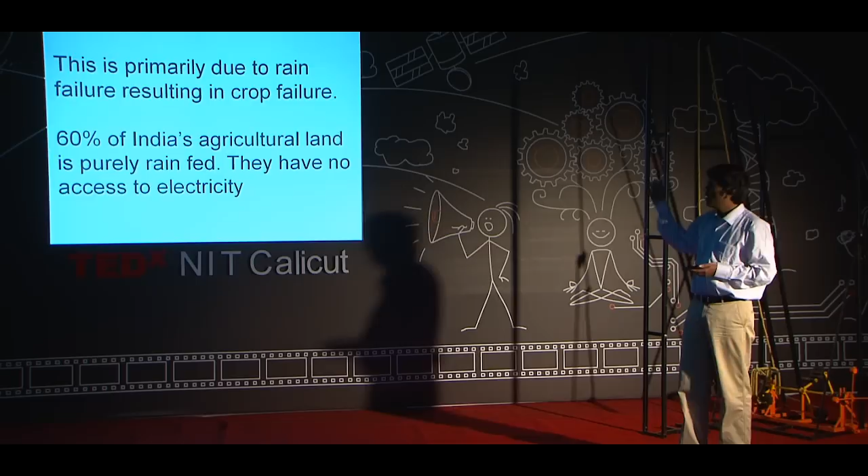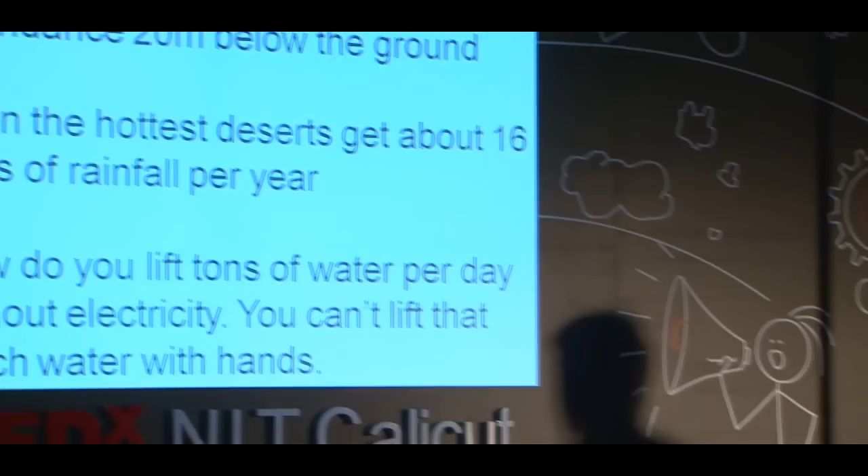The fourth is the fertilizer. Fertilizer you can buy from a shop. There is no contingency in fertilizers. The only contingency is in water supply. You don't know when it would rain. Water shortage is not a supply problem. It's a distribution, storage, and transportation or lifting problem, because even the hottest desert in India has 16 days of rainfall. So during those days of rain, there is plenty of water. It's even in places where there is acute water shortage towards the summer.

And how do you lift tons of water from the ground when the water level is, say, 10, 20 meters below the ground? You can't lift that much water with hands because you need tons of water. Wheat requires between 7 to 15 tons of water every day. Now, if you use drip irrigation, you can do it by 5 tons or 7 tons. But you cannot lift that much water of 5 to 7 tons per acre per day for wheat with hands.

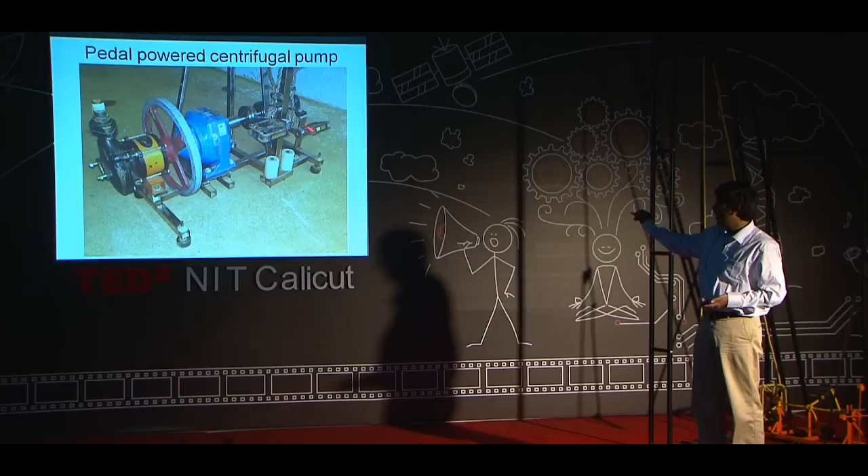So I decided to make a pedal-powered centrifugal pump. What you see is a pedal-powered centrifugal pump, and those are the pedals there. Those two pedals will go up and down. It's similar to a stepper mechanism, but not exactly a stepper mechanism. It's cheaper than manufacturing a stepper mechanism. That is the axle, and you have a gearbox here. And this is the flywheel, and that is the pump. So the pump is only this much, and this is the inlet section of the pump, and that's the outlet.

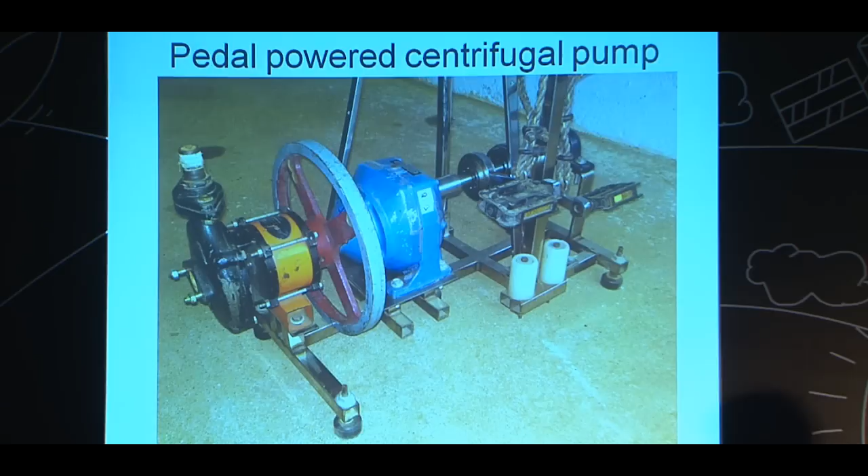So if you substitute this with an alternator, it becomes a pedal-powered generator. And if you remove this and put a compressor and then a condenser, it becomes a pedal-powered refrigerator. According to Wikipedia, an average adult can generate 240 watt-hours in 1 hour of exercise. 240 watts you can generate in 1 hour. And professional sportsmen can create 600 watts for 1 hour. So 600 watt-hour. That is like working 2 laptops.

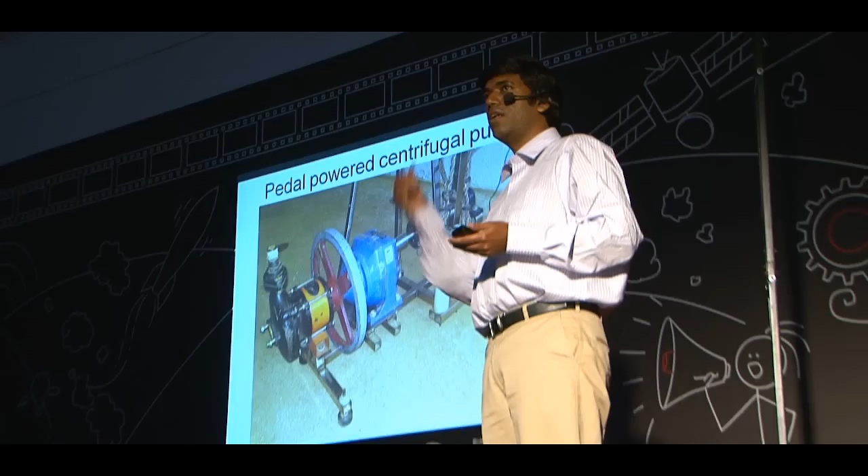Say a laptop consumes about 15 watts. So if I exercise for an hour, imagine if I can recover, say, 150 watt-hour from a battery. So I can work a 15-watt laptop for 10 hours with about an hour of exercise. So that's not bad. If you're using LED lighting, with half an hour of exercise, you can power your entire lighting needs in a hostel for a day. Imagine you are a single occupant.

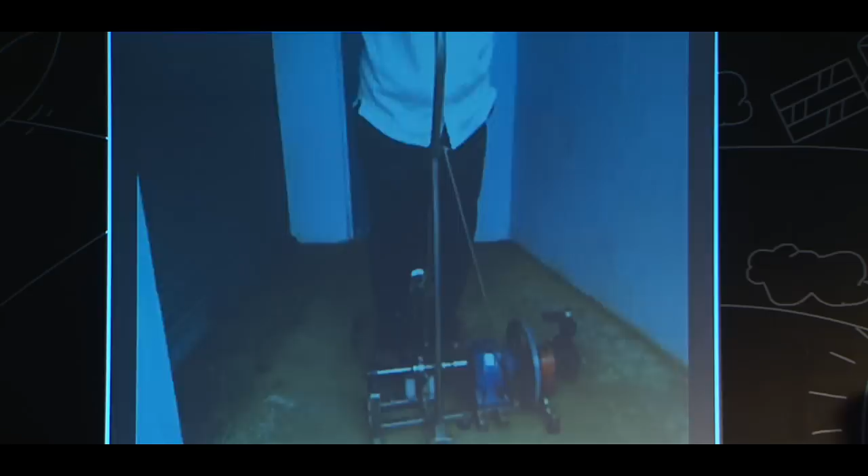No, this one. So I made this, and this is a man pedaling, and that is a rotating part, and he's pedaling slowly, and there is a gearbox here. And the gearbox has a life of 20,000 hours, so it never fails. And you get up to 2,000 RPM, which is the required speed to optimize a generator, and it's also good for pumping. A flywheel is added to make the flow of water output smooth. It's also good for pedal power generation.

So next video. Now that's the close-up, and the handle is in the front. Next video. Yeah, this is a video of this being used as a pedal-powered water pumping machine. My friend Padmanabhan is holding the pipe from the second floor, so this is at least 9 meters. It can pump up to 20 meters if the pump is more efficient.

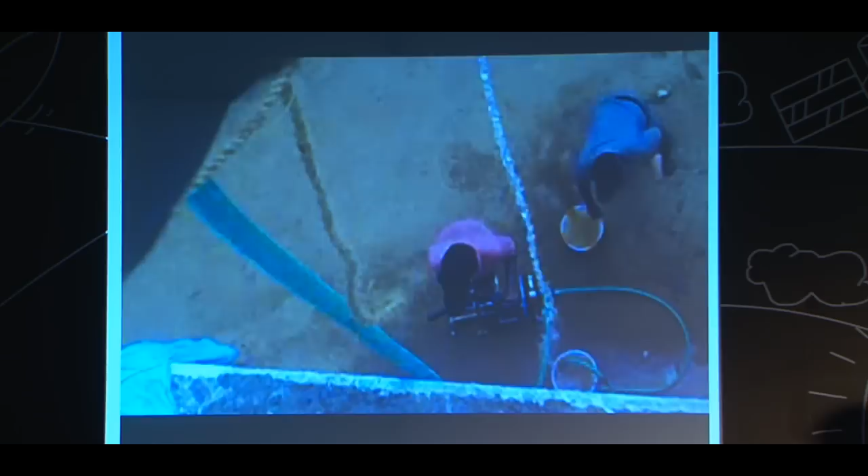Now I'm using a locally made pump, but if it's a stainless steel pump, it can pump up to 25 meters. But again, I'm not going to spend more time on this. You can see the discharge is fairly good. It's about half liter per second, which is fairly good, about 30 liters per minute. I'm going to go to the next slide. So I'm standing at the bottom and I'm pedaling. It's like once per second, so it's not very strainful. I can do it like that for about 20 minutes without stopping.

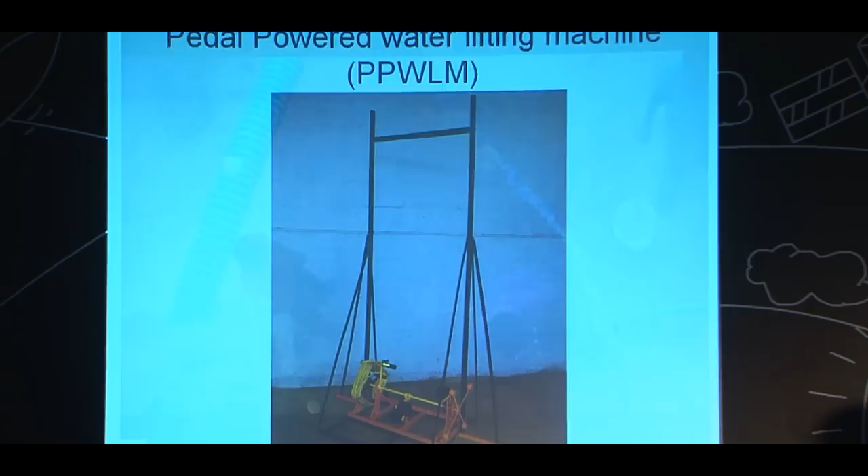Now, after I made this pump, I was so happy that it worked the first time I made it. Actually, it's the fifth prototype. The first one worked for 2 meters, then 3 meters, then 9, 12 meters now.

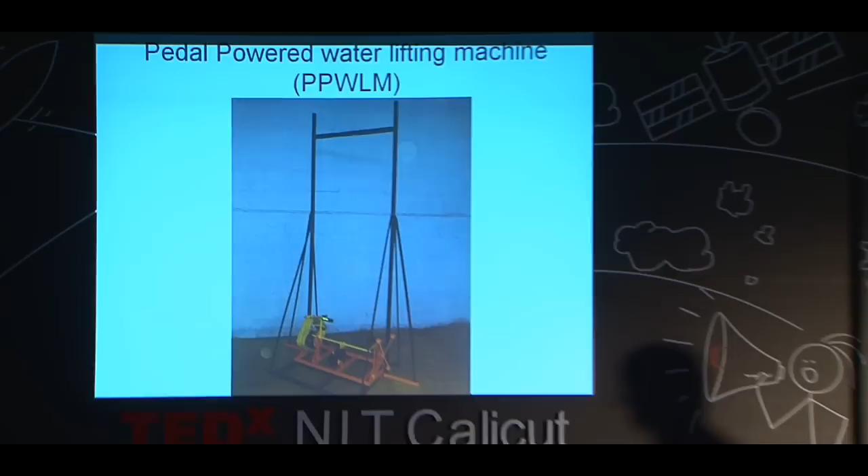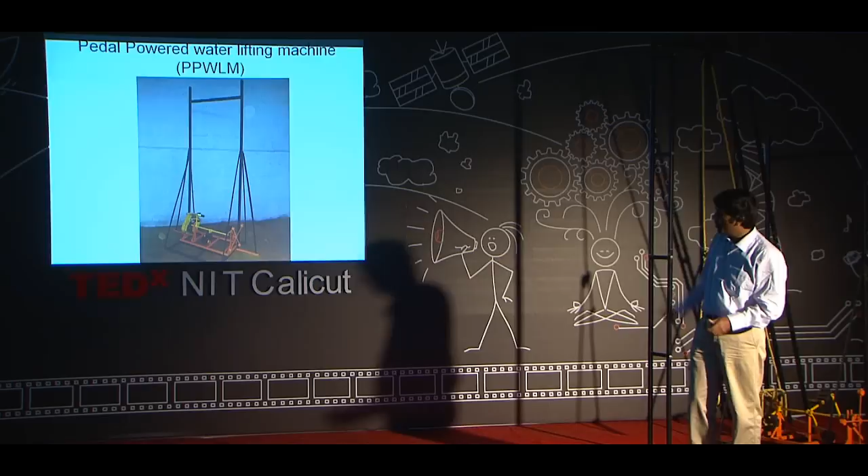I realized that the efficiency of pumping is only about 30%, but the efficiency of lifting is about 100%. So if I lift this, all the energy that I'm generating from my body is being used to lift the cell phone. But if I pump water up, at least 70% is lost. And for lifting, you don't need a gearbox, you don't need high RPM, you don't need a flywheel.

So this lifting is going to be at least 3-4 times cheaper, 3-4 times more efficient, 3-4 times less maintenance requirement. So I got a good idea after the less good idea. You always get good ideas late, but that's okay.

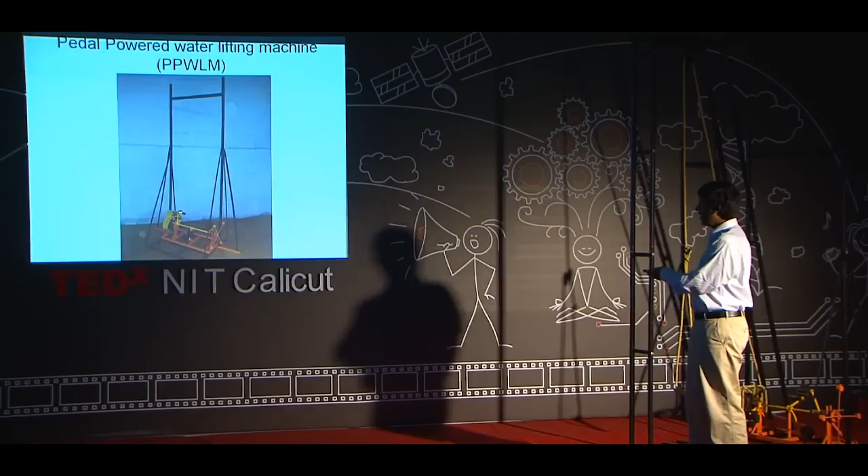So I made this. This is the machine, and this is my friend Padmanabhan there, and that is the bucket. It's a 65 kilogram capacity bucket, and you have 4 holes there, so you can adjust the amount of water inside. If you open the first hole, the water will overflow. And there is a pipe.

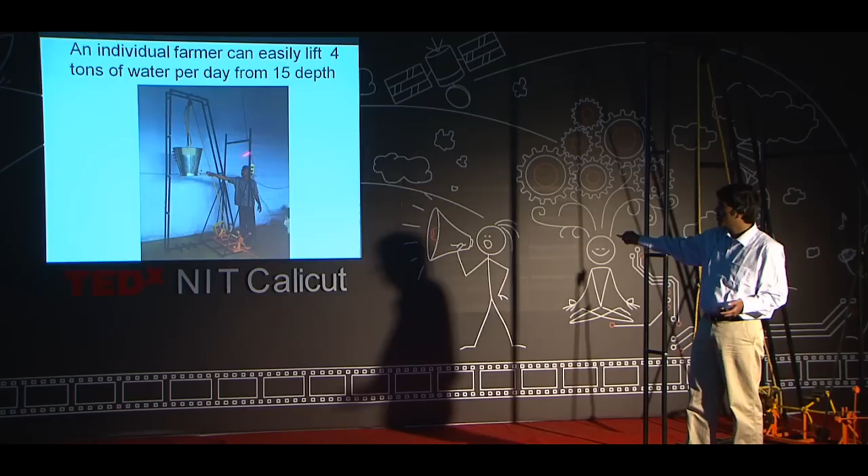So you pedal and you lift 65 kilograms of water, or even 100 kilograms of water if the bucket is made bigger. And when the bucket comes to the top of the well or the river, you open this pipe and take the water out into a storage tank. And then you lower the bucket and swing the rope, and the bucket will be full in 2 or 3 seconds. And then you repeat the cycle, which I will demonstrate here.

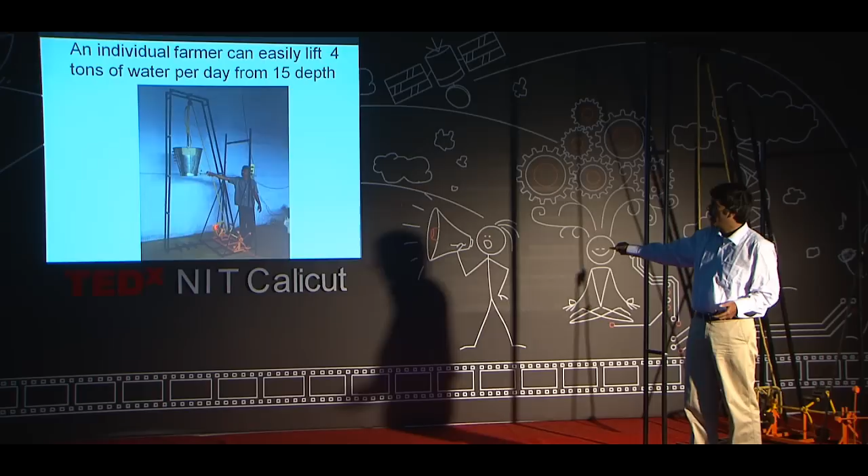This is the pulley, and if I reduce the diameter of this pulley, then I can lift, say, 120 kilograms. If I reduce it still further, then I can increase to 200, 300 kilograms. So there is no limit to the amount of weight that you can lift. But after doing lots of calculations from the angle of economy, we realized that 65 to 80 kilograms is the best to keep the cost down. Of course, if you increase the weight, the speed of lifting will reduce, but that doesn't matter.

He weighs 49 kilograms. He comes to the machine and he starts pedaling. As you can see, it's a 4-pedal mechanism which I designed. He's pedaling it slowly. We tried with the 2-pedal mechanism, but it cannot lift this much weight. It can only lift about 10 kilograms. For the ease of explanation, this is a bucket which has the capacity to lift 65 kilograms.

It contains water up to 50 kilograms, and he is now lifting it. It goes over to a pulley, as you can see, and he is now lifting it by pure pedaling. Once the bucket reaches the top, he will stop pedaling, and there is an automatic clutch lock mechanism. Once you stop pedaling, the bucket will not fall down, even if he steps off the pedal, until you release the clutch.

And once the bucket reaches the top, he will open the pipe and drain the water. This is a 1-inch pipe. It takes 30 seconds to drain the water. But if you put a 2-inch, 3-inch pipe, the water will be drained in, say, 5 seconds. Since we don't have a well, okay, done.

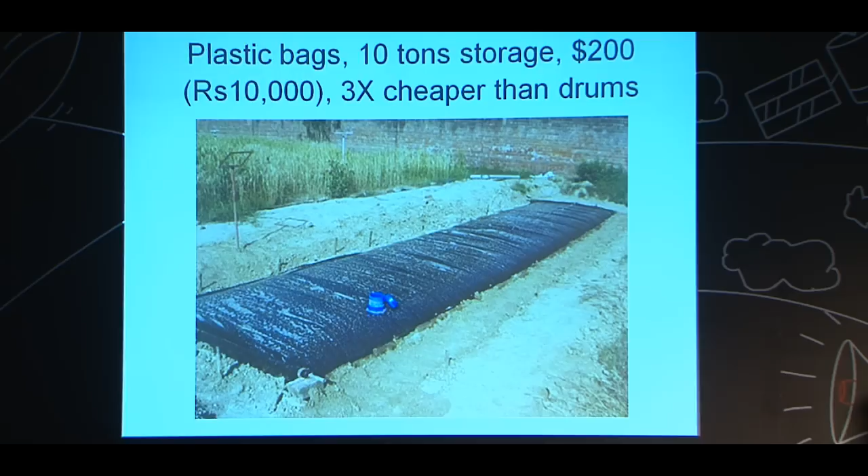Okay, this is recently made available flexible plastic tanks. Whenever there is rain, the water levels are high, as high as 5 meters or 2 meters, and then farmers can lift tons and tons of water. A farmer can lift even 10 tons of water in one day without much effort when the water level is high. This is a flexible plastic tank which can store about 10 tons of water.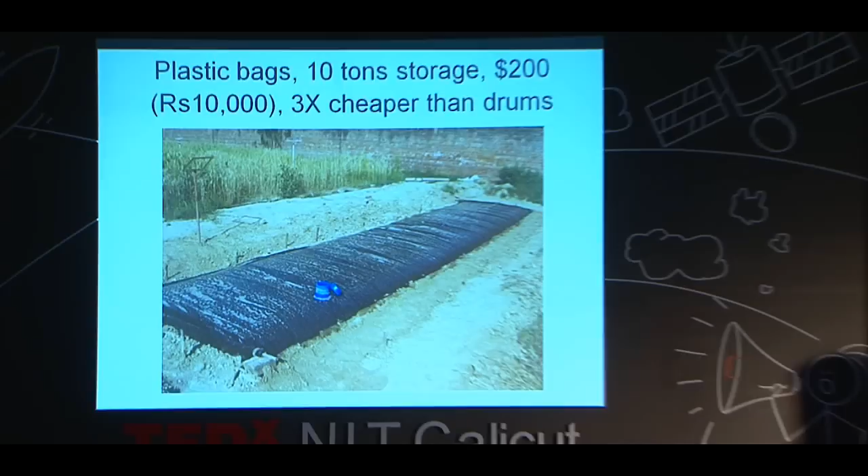It's pretty damn cheap. It's about 3 times cheaper than the plastic drums which are normally used by some farmers. And the transportation cost of this is also almost zero because you can fold it and put it into a car, unlike the drums. As you're aware, most of these farms are not easily accessible, so the cost of transportation of the storage devices is a major factor. Some farms are something like 6 hours away from the closest railway station.

Now, how much land can a farmer wet by pedaling? For wheat, an individual farmer can wet 2 acres of farm by pedaling 2 hours per day for a water depth of 20 meters. This is considering the input of rain. Sometimes people ask me, can a farmer actually lift enough water for farming, because farming needs a lot of water? The answer is yes, because a lot of this land is not in deserts. There is rain. That's why farmers plant seeds.

But the dates of the rains are not very predictable. Imagine farmers expect rain after 2 weeks, and they plant the seeds now and put some water. At the seed level, the plant requires very little water, which they can lift by hand or by some other method. But when the plant grows up, it needs a lot of water. Now imagine the rains are late by 2 weeks, or say 1 week, and it's summertime; then the crop fails. The farmer only needs enough water to supply for that 1 week.

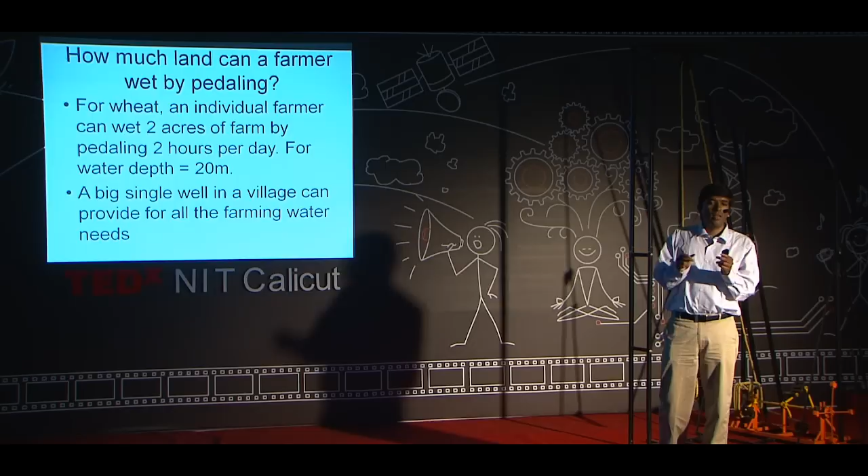The farmer need not supply water throughout the crop period. For wheat, it takes 120 days. 4 months is the crop period for wheat, which means after you seed, you can harvest the wheat after 4 months. But you don't have to provide water every day. You only need to provide water for that 1 week of delayed rain.

Now rain comes after 2 weeks, and it must rain again after 2 weeks. If it doesn't rain for 3 weeks, again the crop could fail. So again, you only need that stopgap arrangement. That's why this will work.

And again, an average Indian farmer has 6 adults in their family, and an average Indian farmer has 5 acres of land. So an average Indian farmer family, based on 2 acres per head of wetting, can wet 12 acres of land. So there is an overcapacity here.

A big well in the village, when dug, can provide a lot of water. The government of India provides free funds for digging wells, and many farmers do have wells, because farming is a generation-old profession. Some grandfather should have built the well.

Advantages over solar pumps. The only way to pump water where there is no electricity is to use solar pumps. The other, wind, is not reliable. So solar pumps are pretty damn costly. And the transportation issues, maintenance issues, it's very advanced circuitry.

So the advantage, with this machine, you can lift from any depth. You simply extend the rope, and it's 8 to 25 times cheaper. Why is it so? The solar submersible pump, which can pump to a height of 5 meters, cannot pump to a height of 10 meters. So for that, you need to buy a bigger solar pump, which costs twice the price.

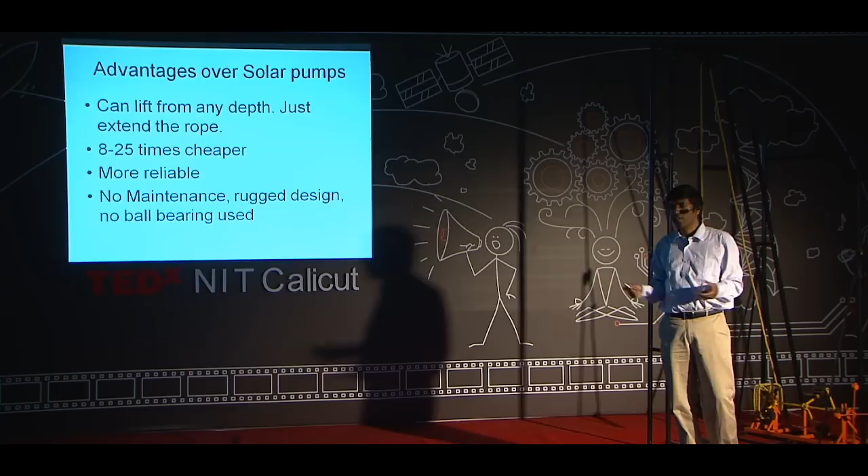Now, if you want to pump to 20 meters, you have to buy a still more capacity pump, which will cost 2 to 3 times more. If you want to pump to 40 meters, still more. 80 meters, still much, much more. That's why even if you compare with the cheapest specification, it's 8, and it goes upwards.

And it's more reliable because it's all mechanical parts. Like they say, the most reliable vehicle in this world is a bicycle, because it's all mechanical. Nobody asks for a guarantee for a hammer. No maintenance. I'm not even using a ball bearing, because it's a low RPM machine. It works 24 hours a day. Solar works only for 8 hours. No risk of theft, because you can disassemble and take it home.

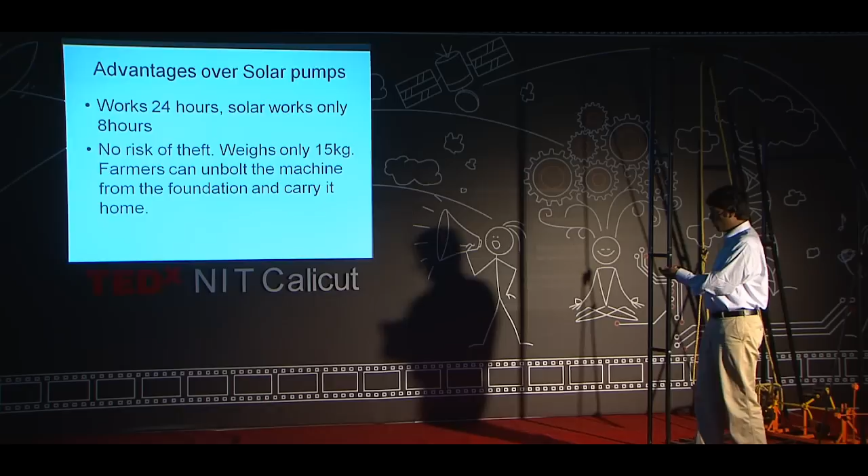The government could provide a free pedal-powered water lifting machine to all needy farmers in India. The cost of the pedal-powered water lifting would be recovered in 1 to 2 years through increased tax revenue from increased crop output.

Demonstration. Please, Padmanabhan, come. Okay, Padmanabhan has a weight of 65 kilograms. And as you can see, I'm going to lift. This is an older model. The new model is being installed in one of my friend's farms in Kerala. It is close to Perinthalmanna. For the new one, I have the handles in front. This is slightly inconvenient, but it works.

So we tried different handle positions. So you see, it's so easy. I'm lifting him. So you can see that if you're lifting and if you're tired, it's a perfectly safe mechanism. Now, can you get down?

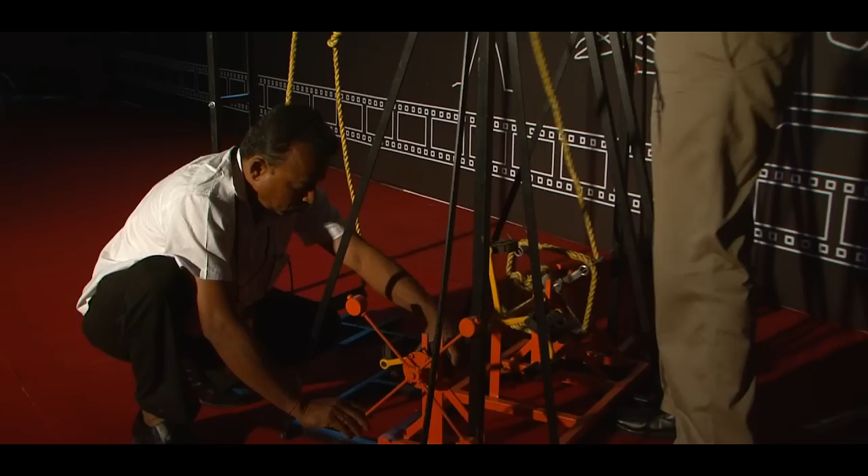Yeah, down. Thanks. So after I posted this video, a manufacturer from Bangalore contacted me and told me that they can give me a press button mechanical clutch. So next time to bring down the bucket, imagine if there's a bucket, it will go down by gravity once the clutch is disengaged. So once I have a press button clutch, it will be much easier. That is a new model. At some other time, I could bring it here and lift some water.

So I got some messages and some interesting statements. A child learning to walk requires more creativity than making the top 10 inventions. And this is my belief. And this means that all of you have invented the radio, telephone, the engine, the ball bearing, all before the age of 3, because all of you have learned to walk all by yourself. This is an equivalent achievement. Okay?

And sometimes people tell me that they can't come up with new ideas, and then I ask them, have you seen a child which has not learned to walk by the age of 4? Will a child ever say that walking is so risky that I prefer to be in a wheelchair? So all of you can come up with new ideas. And problems posed on us by nature in life are its way of giving us new ideas, because when we try to solve those problems, we get new ideas. Thanks, that's it.